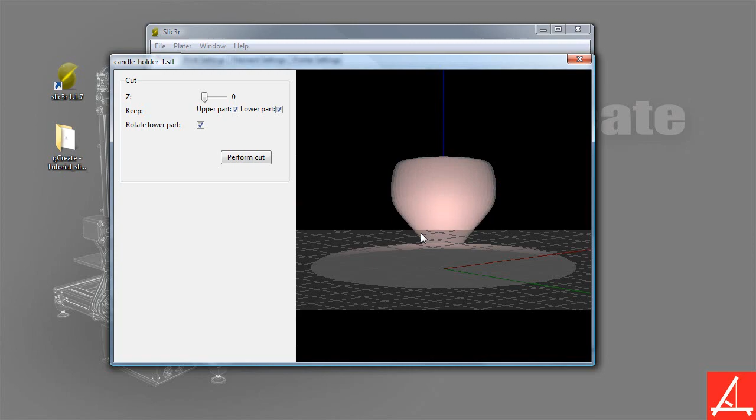One good way to check is, in Slic3r 1.1.7 at least, to double-click the model, and you'll have a 3D representation of the model pop up. This is where you can see if there's any open faces or any problems. This particular model has no problems - you'll see that it's a very clean, simple model, and it's a candlestick holder.

So I just wanted to show you that if you see errors under manifold, it's a good indication that something's wrong with your model. Again, if you double-click the model, this is a good way to visualize your model, and I can briefly describe how the slicer is going to operate.

So what we're going to do is slice this model into a series of layers. This particular model doesn't require support, and it doesn't require a whole lot of infill. By support, what I mean is - this is obviously the side view of the model here - and you'll notice that this overhang here isn't too extreme, so our printer can actually print this type of overhang just fine.

If this was a much steeper overhang, something like this, then you might have to have support below to actually hold up each layer as it's printing.

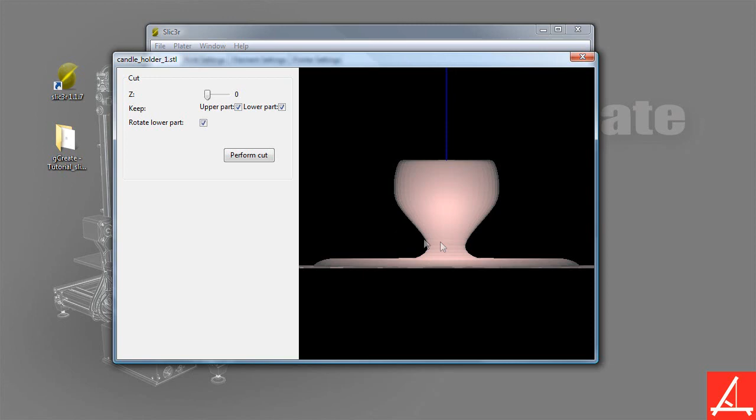In this first model, we're not going to have any support required. We just want to show you a very simple model to slice with.

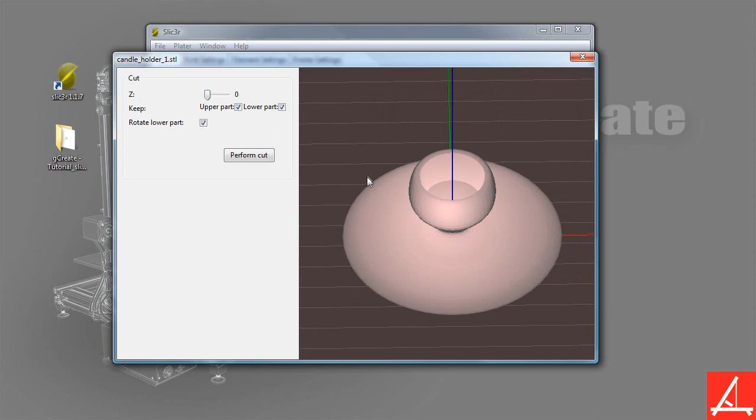These settings here are built into Slic3r. If you wanted to cut the model and have a flat surface on the bottom, or split the model in half, you can do that, but we're not touching these.

These are ones you can play with on your own if you choose. Okay, so basically what we want to do is we have our model loaded.

If you wanted to go ahead and view the info of the model, it's here. The different settings for the different material types and print settings you might want to use are here. These are the default settings that we supply with our printer.

And you can choose your default material. As you build up your material and filament collection and your print setting collection, you can add your own presets if you want.

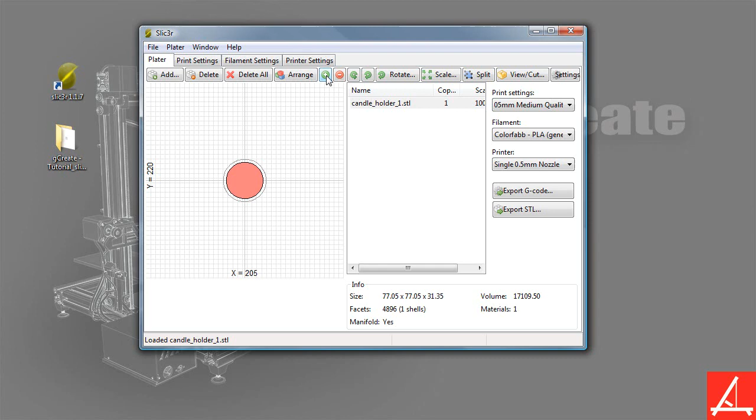There's a few different buttons here that we're not really going to play with right now, but the basics are that if you want to print more than one of these models, there's a button where you can duplicate and print many at one time. Every time you click plus, it just adds one of those models, which you can individually move around on your platter if you wanted to.

And as you subtract, it just takes away the last one that you added. This is a good way that if you want to print 10 of the same object, you can do so. Also, if you want to subtract the model or rotate it, you can do that.

Scaling is very important. We've noticed that with some of our models, the conversion from inches to millimeters or vice versa, scaling is very important. So if you pull your model in and it's very small, chances are you have to scale it between millimeters and inches.

If it's very small and you want to go to the proper size, we found that the proper scale is actually 2540. That's the proper scale to go from millimeters to inches, or vice versa.

But in this particular case, this model's already been scaled and everything's proper on it, or actually it was exported with the proper scale. You can also split and cut view your model. View cutting your models is done by double clicking, as you see here, or you can also click that.

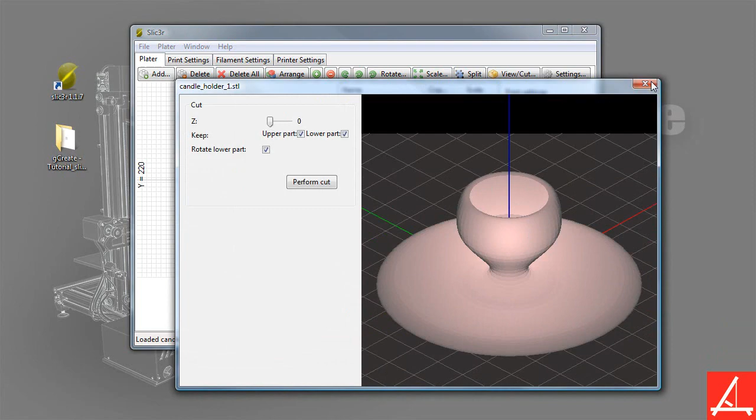There's also different settings you can change per your model. There's a lot of modifiers you can add and a lot more advanced features. We hope to cover that in a future video, but for now it's definitely not important.

So basically, after showing you the general overview of the main window, now that you have your model loaded, if you go to Print Settings and make sure you have medium quality selected, you can pretty much go ahead and slice your model.

What we're going to do, I want to show you, we're going to slice it in 2 different layer heights so you can see the dramatic differences. So when you click these different settings, you can actually change them and then save it as a new preset if you'd like.

Or you can just go ahead and do a one-off and export it as is. But basically, these settings here are supposed to be jumping points. They're not supposed to be end-all, solve-all settings.

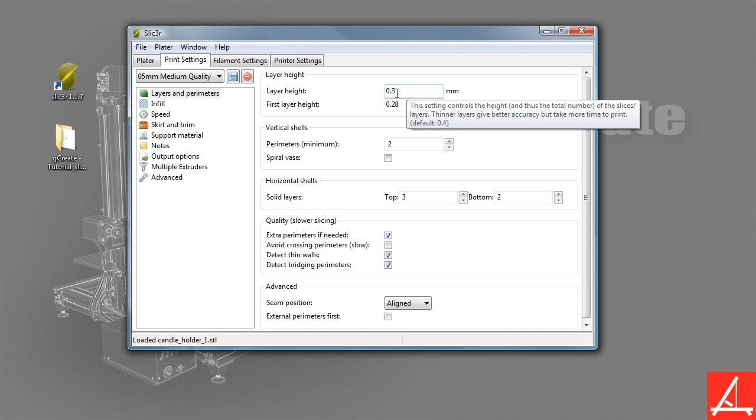But again, as I mentioned, I want to do 2 different slices. So one will be where layer height's at 0.3, and we're going to set infill, keep it at maybe like 20%. Speed, everything else should be fine.

And then go back to your Plater, and now we can go ahead and export G-code. Let's just go ahead and save it. I like to save it so that I remember what the layer height was. You can actually open the file itself, but it's easy just to see the file name. So let's say it's, what did I say, 300 micron is the actual layer height.

And the slicing of this should be relatively quick. It's not a very complicated model.

As you see, this is real time. It was done in a matter of seconds. Now also what we're going to do is go ahead and turn the layer height down to 0.1. So we went from a 300 micron layer height to a 100 micron. So it's actually 3 times as many layers, or I guess 1/3 the layer height. So theoretically, this should take 3 times as long to print, but yet our print should be much smoother.

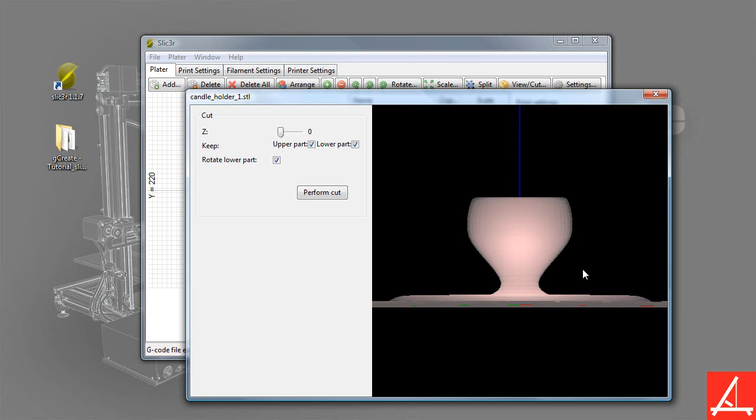Lowering the layer height and making it a finer resolution, it really only comes into play, in my opinion, when you get very low slope surfaces. So you have to remember that when you're slicing this model, it's slicing the side view into many layers. So when it's slicing these into a lot of layers, this area up here, because the walls are almost vertical, you don't notice the layers as much. Now down here, because it's so flat, think of it as like a topographic map. You'll see the actual layers on this lower portion here.

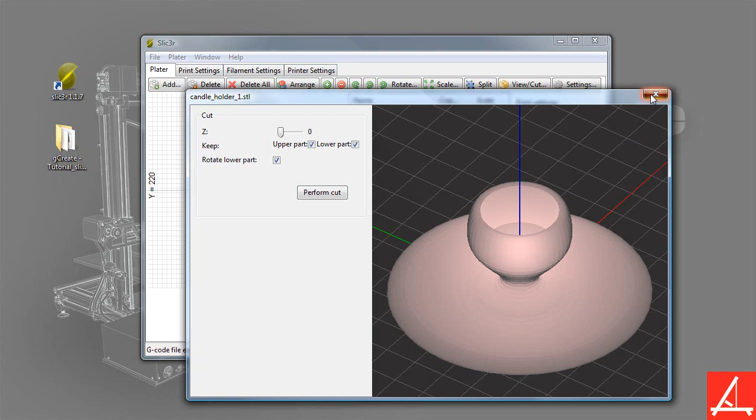There's advanced techniques where you can actually set it so that this lower part here will have a finer layer height than the upper part. But for now, I just want to show you where we do 2 completely different slices, one at 300 micron and one at 100 microns. So now that we've already set this layer height to 100, there's no other changes. Everything else is identical. Let's just go ahead and go to Plater and do Export G-code now.

You'll see that the first one's already been saved, called Candle Holder 300 micron. Let's go ahead and save it as 100 micron for the new file name. And again, it should slice pretty quick, but it's going to be slower than the last one because now we have 3 times as many layers. Okay, now if we open up this folder, we should see one file and another file.

You'll notice that the 100 micron is 2.1 megs, and the 300 micron is 849K. So it's actually a pretty big difference, because this 100 micron file has so many more layers. So keep that in mind. Quality is not always what you want. Sometimes you want to do a quicker model because you don't have 3 days to sit there while it's printing, but it's very important per model, because if your model has a lot of low flat surfaces, well, maybe you do want to do a higher layer count.

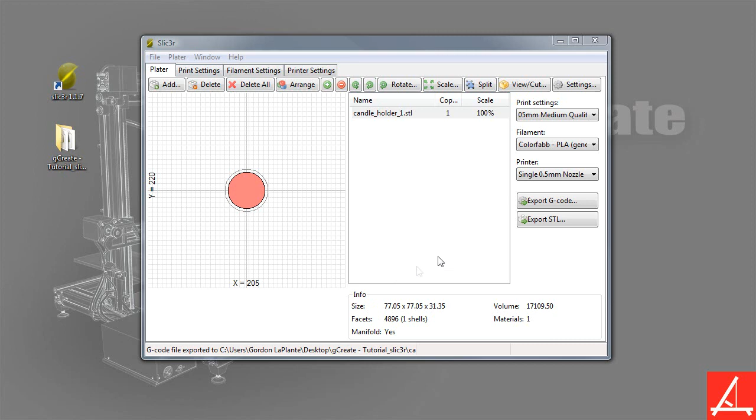Okay, so now that we have those two saved, I'm going to go ahead and go over and print them, and I'll show you the results. Hi guys. So I loaded the 100 micron file into the printer, and it's printing away right now. If you listen softly, you might be able to hear it. It's actually behind me, but while that's printing, I want to give you a quick overview of, now that you've sliced your model, how can you actually see what it looks like slice-wise? Like, how can I actually watch those paths?

We're printing our model from the LCD screen on the printer, so we're actually not controlling it with the computer. But if you want to see what every slice looks like, which I highly recommend, you can use Printrun or Pronterface to do so. So I actually have it open here. We're not going to go into what this program is in this tutorial, but this is the program we recommend as the host software if you want to run your printer from your computer.

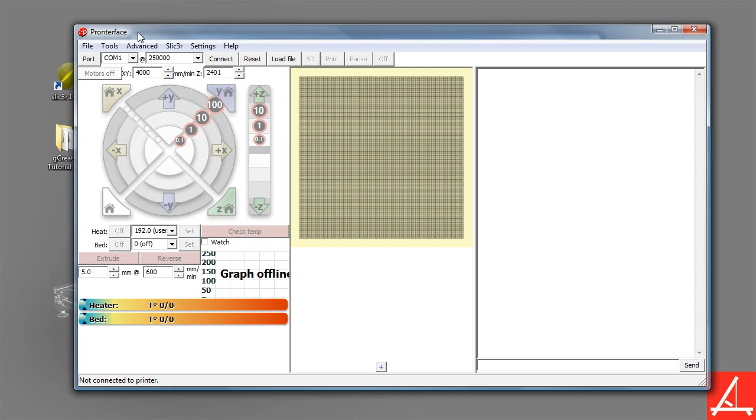But the reason I bring it up is because it also has a visualization engine to visualize the G-code file that you just created. And there's plenty of them out there. Repetier has one and everyone else, but this one's the quickest, in my opinion. It just works really quick and it's easy. So go ahead and open it, and now you can go to File, Open, and open the G-code file that you just created, either one, let's say at 100 micron.

And now if you give it a second, it's going to tell you some important information. So first off, how much filament is used in the print. So we're using about 4600 millimeters. In my honest opinion, that's a pretty small model.

Each 0.75 kilogram spool from Colorfabb has about 250,000 millimeters of filament. That's a pretty good guess right there. So that would mean that each 1 kilogram spool from eBay or whatever would have maybe about 310 or 320,000 millimeters. So we're only using 4600. So it's a pretty small print.

You also can see the overall width, the depth, and the height, as well as the estimated duration. So this is saying it's going to take about 55 minutes to print this model. Don't forget, this is at 100 microns, so it's a very fine layer height to print this for about an hour. I found that with the estimated duration, pretty much across the board, add 10% to that time, and that's your actual time.

If you're doing a 20-hour print, add at least 2 hours or an hour and a half, because sometimes the newer version works much better, but it's still a little bit off. So this might take, instead of 55 minutes, more like 60 minutes, something like that. But yeah, this is a very useful tool because you can see how much filament you're using and the estimated time.

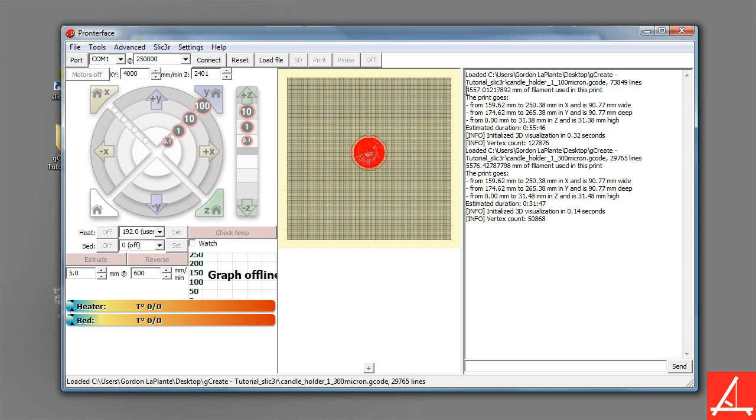Using these G-code visualization tools is a great way to test all the different slices you might do, because you can slice this 20 different ways and then see what each one does. Something else that PrintRun has is if you double-click the center space, you'll get a quick visualization of the model. So if I zoom in here, right now I'm on the top layer. As I scroll down, in cyan there, you can see what every single layer will look like.

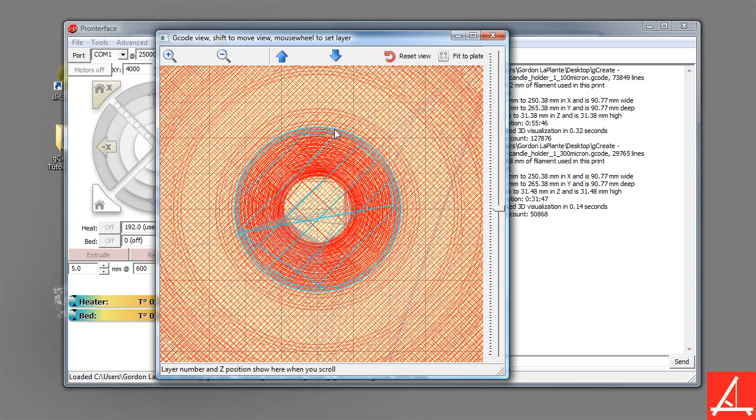So this is a very useful tool because you can see, let's say about midway through the model, here you can see the outside. This is the shells I was talking about. And then here, these diagonals, this is the infill. And as I go down one layer, the infill goes the opposite way. So the way this particular infill works is each layer alternates, but it still makes a grid.

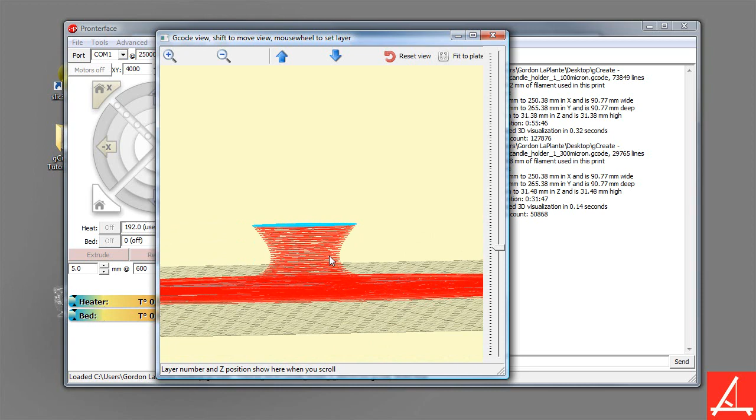And you'll see the outside shell is stepping in because of the portion of the model that we're at. As you turn it, here you can see all the layers on a side view basically. As we step up, that's each one of those layers. And here's the infill, because this happens to be a solid portion of the model. This is a really good way to think of 3D printing. Don't forget that there's a series of layers, so as you're going up or down your model, you can see all of those layers.

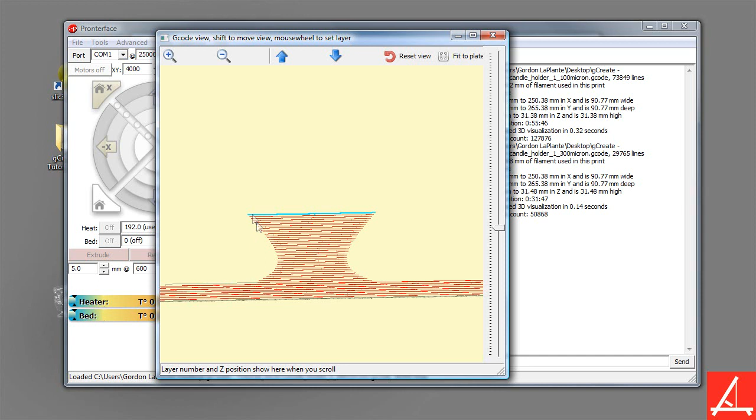This is very important because at this point in the model, if our model went way out here, there's nothing below to support it. It's not printing on top of anything. Because this angle is not too steep, it's actually printing on top of itself from below. It's just enough that it's close. But if it was really extended, that's where you would have to have the support material we were talking about. Otherwise, as it prints that layer, it'll just drop on top of nothing and create a mess.

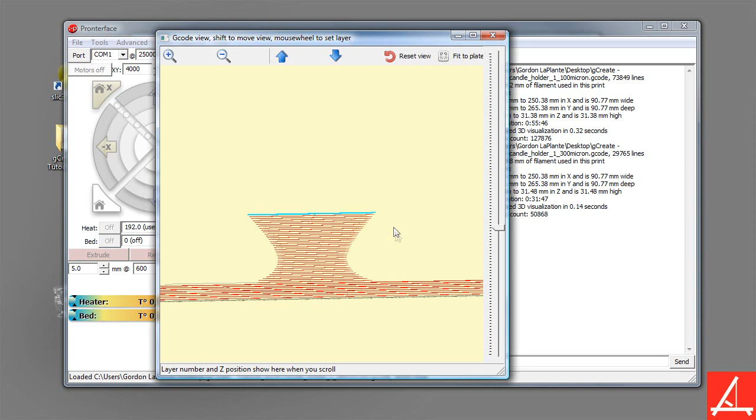So keep that in mind while you're slicing. But in this particular model, even at 300 micron, we shouldn't really need it. So actually, I want to go ahead and open the 100 micron one again, because you can see that there's a lot more layers.

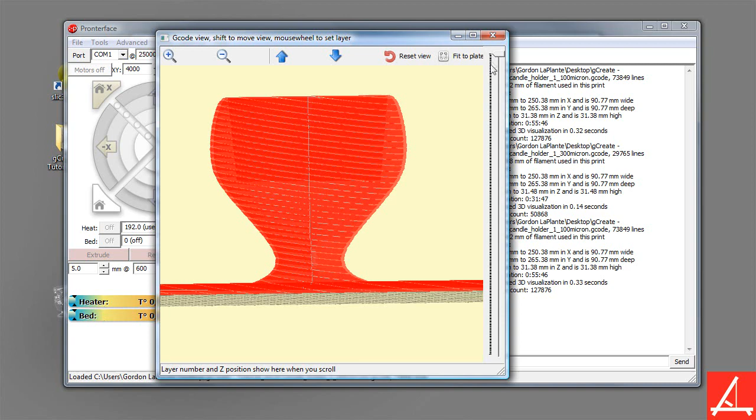Okay. Now you can see, look at how thick all that is. Now as I scroll, and this bar here, actually, these are all the layers. There's a lot more layers. Now the important thing is, as the layers get finer, as I zoom in, you can see that overhang doesn't matter as much, because now each layer going up the next step, it's just a smaller overhang. Whereas before, each overhang was very big, very big, very big.

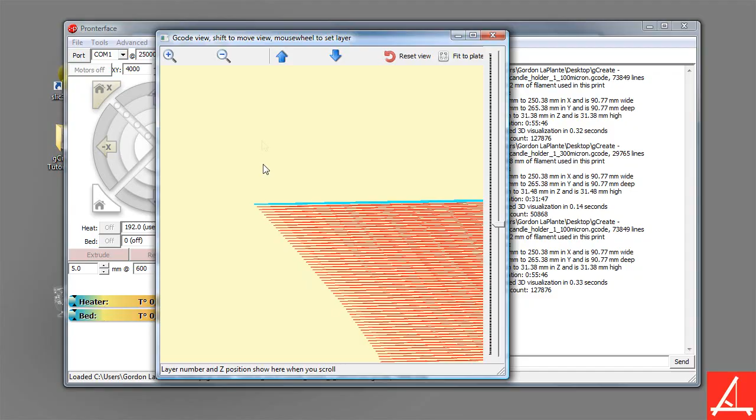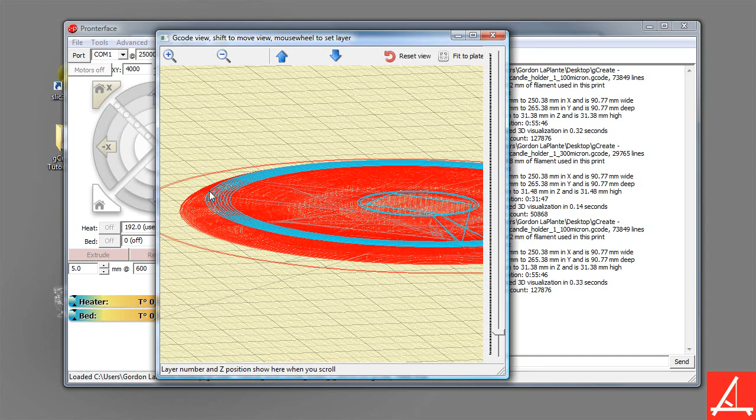And you can also see, let me scroll over here, as I go down the layers and we get towards the bottom, as I mentioned, now here's where you start to see that kind of topographic map I was talking about. Because it's such a shallow angle, as it's printing in the center part of the model, it's actually printing these outer layers as well. And then look, it's actually doing 4 outer layers here, and that's the last one. And then it's doing, what is it, like 8 almost? Yeah, 8 layers here, and then a whole bunch more. So very shallow portions of your model is where you'll actually see the layers the most.

Now, in the case of that 300 micron file, this is going to be much, much more of a rough portion of the model. You'll actually see the layers go around and around. But again, if you're going to finish it with a paint or some sort of finisher, Bondo or something, it doesn't really matter. But if you're going to just print your model and pull it off, well, maybe you want it finer. But it really is all a matter of time and quality that you have.

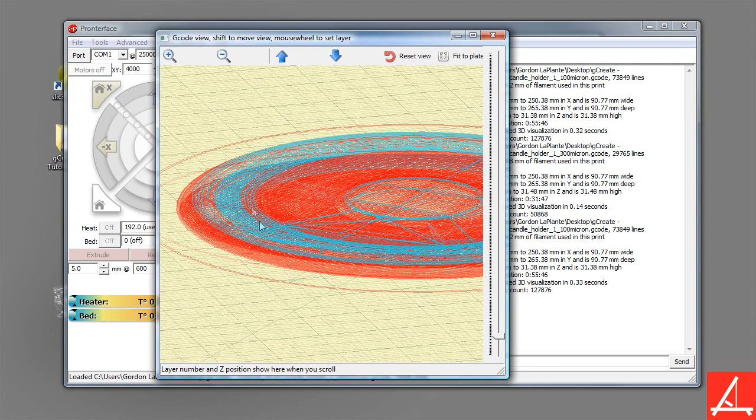But yeah, I just want to give you guys a quick overview while we wait for the print to finish of how to actually look at your model and see how much filament you're using, as well as how long it might take. So I'll get back to you in a second.

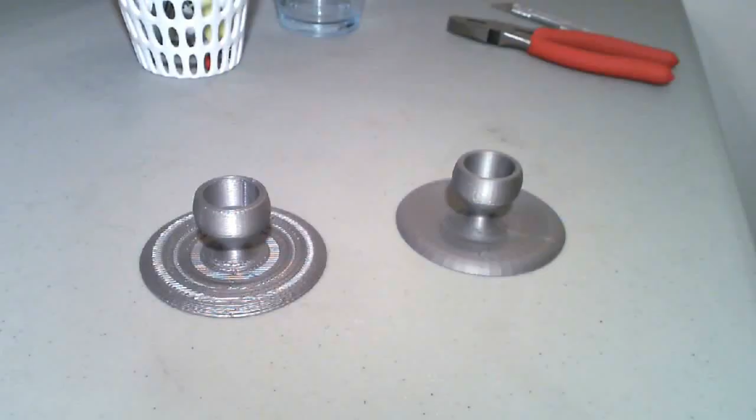Okay, so the print's just finished, and I just popped off the 300 micron print, which you can see on the left side of the screen here, and the right side of the screen would be the 100 micron print. And you can actually see a pretty stark difference between these two prints. The filament I chose to use is actually a ColorFabb. I believe it was shining or sterling silver. It's actually a PLA, but it has a very high reflectivity, kind of specular quality to it. So it's a little difficult to print with, depending on if you have your slicer settings set up just right. But I purposely chose it for this tutorial so you can actually see the stark differences between the two.

Also, I know earlier in the tutorial we estimated how long we thought it would take to print each model. So it turns out the 300 micron print on the left side took about 38 minutes, while the 100 micron print, which has essentially 3 times as many layers, took about 1 hour and 9 minutes. So it was a little over twice as long. Sometimes it takes 3 times as long, sometimes it's not quite that dramatic. But in this example, maybe it's worth that extra, twice as long time to get the results you see. So let's go ahead and jump right in.

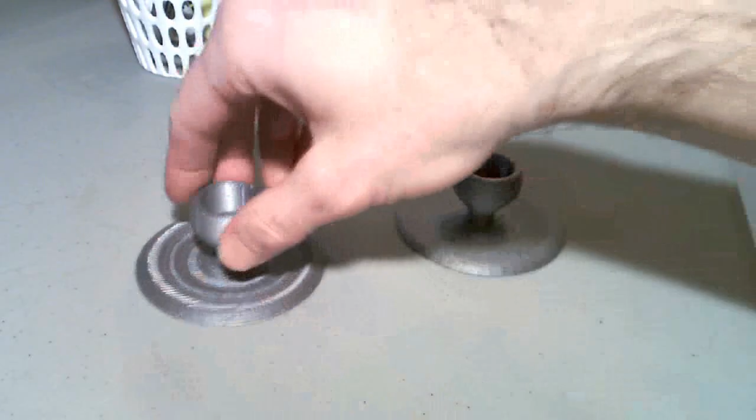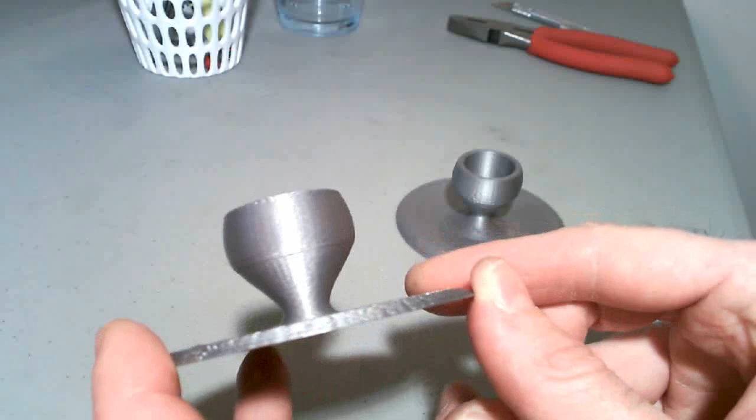For the 300 micron print, as I mentioned earlier in the tutorial, the upper portion really didn't have a problem. It printed pretty nice and pretty clean. Because you're going up along the layers, you really don't notice the layers as much compared to the lower portion. So the lower portion, because it's such a low slope right here, you really notice the layers, and you really see the steps between layers as well as the infill from the printer itself.

So comparing that to the 100 micron print, it's a dramatic difference. So in this particular example, even though the top might not be all that much more detailed, you really notice it in the lower portion. So it really depends on what your model qualities are and what model you're bringing in, and that's what's going to determine your slicer settings. If you happen to have a portion of your model that looks like this, maybe you want to do a finer layer height, somewhere around 100 microns or less.

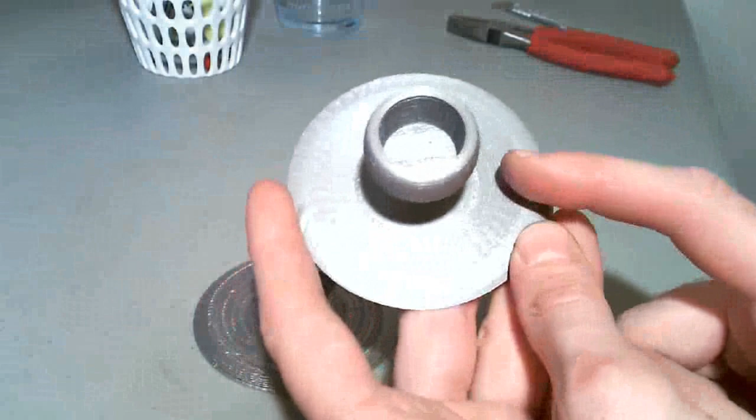But if your whole model consists of a tall vertical piece, well, maybe you don't need to go that fine of a layer height, and you can save yourself some time.

Also, what I want to bring up, as you see pretty much right here, this is the aligned seam I was talking about. So we had the seam set to aligned. So you actually see this is the point where the printer runs around and then lifts up, and then runs around and lifts up. So it lifts up in the same spot each time, basically creating a seam.

Depending on what your print is, you might be able to just turn it and hide the seam so you don't care. But if we turned the seam to random, this individual seam would be spotted all around the model, so you might not really notice it as much. In this example, you can also see on the inside here. In this example, it didn't really bother me just to have a seam there. So yeah, that's why we kept it on aligned.

Also, I want to bring back that if you did choose to print at the 300 micron level, and you have this pretty ugly lower portion, if you're going to finish the model later with another material, well, maybe it doesn't matter. So maybe you save yourself some time by just raising the layer height and making it much more crude to get quicker results. So okay, here you go. You can see some actual first physical results from your very first slice.

So as you just saw, we just finished the first print of our first model, the candlestick holders, which was a relatively simple model on purpose so that you can get your feet wet with actually printing. What we're going to do in the second half of the tutorial is slice something that has a few more variables, so you can see what 3D printing is really about. Instead of just printing very simple models, sometimes you're going to have more complex shapes, or you're going to need overhangs or bridges or support material.

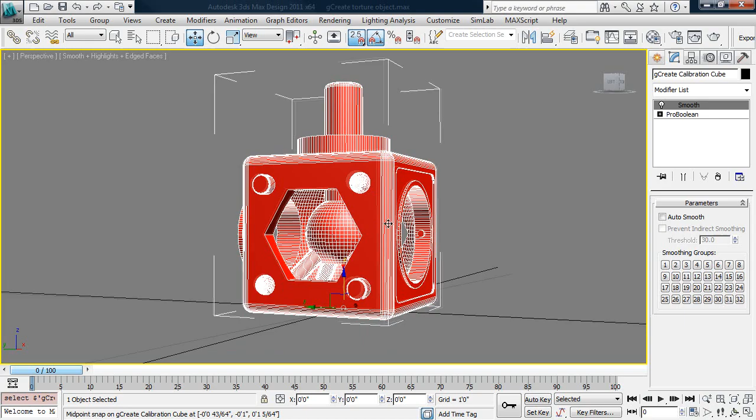So we went ahead and created what we're calling the gCreate calibration cube. It's a cube that can nest together with other cubes, and it has a lot of different things in it that relate to all the different settings for 3D printing. So I'm going to open up 3D Studio Max, where we designed the calibration cube. And you can see here, this is the cube itself. As I pan around, it's a 2-inch cube that has chamfered edges.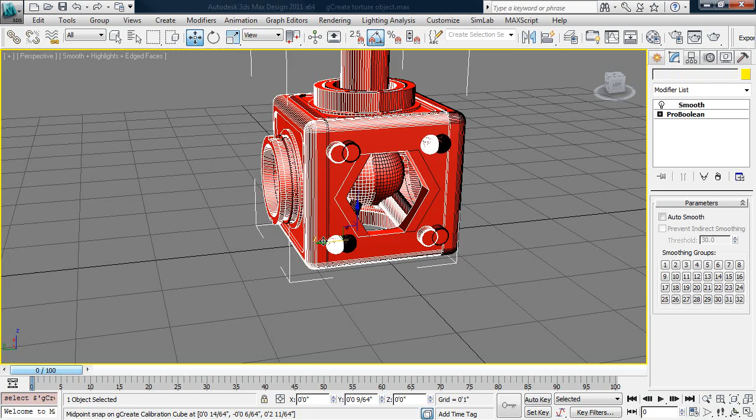And there's an opening on one side that has these two little nubs. This corresponds with the opening on the other side. And there's actually openings here. So if I were to take a second cube and put it over here, you can just literally snap it in place. You have to rotate it and then snap it in place to get it to stay. Or you can also add cubes above.

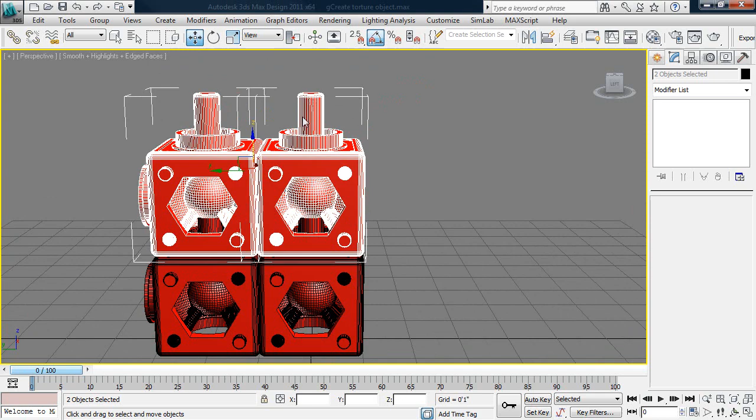And then this upper portion here actually seats into the model. You can see in wireframe here, it actually goes inside the model on the bottom. So if you look at the bottom of the model, there's actually a hole there. So I'm going to delete these other ones.

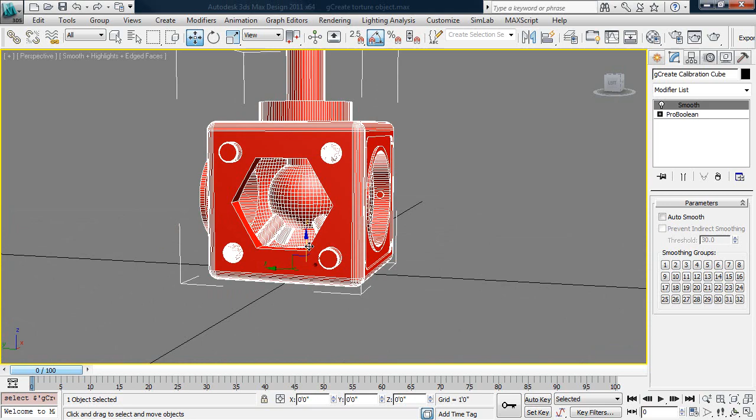You'll see that, as I said before, going around the model, these two pieces on the side here are cylinders, and these are two domes or spheres that correspond to these holes on the other side. So this whole model really should connect together.

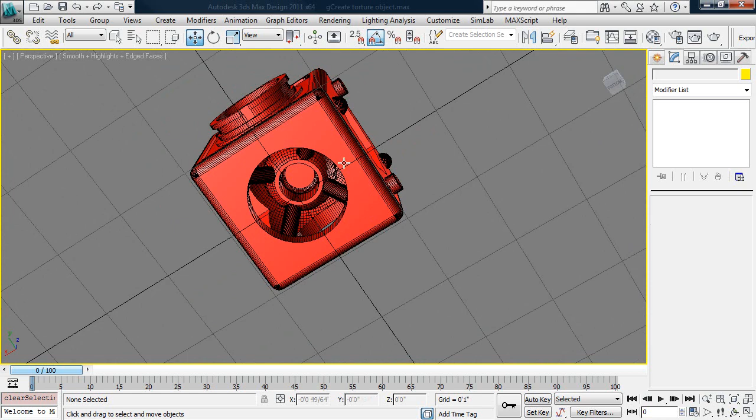And there's a lot of different things in this model that's great for 3D printing, whereas below this piece here is essentially printing on top of nothing, so we have to support it with support material. Same with these guys here. This is actually what's called a bridge. You're bridging straight lines from one side to the other, but we're going to turn support material on for those as well, just to show you.

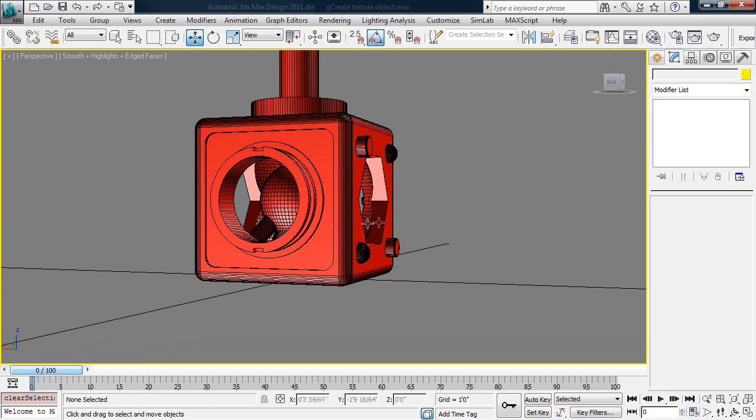These projections here, as you print layer by layer by layer, it gets to this point and there's nothing to print on. You can kind of see the side view here. So these pieces here will just droop into nothingness, so we actually have to support those as well.

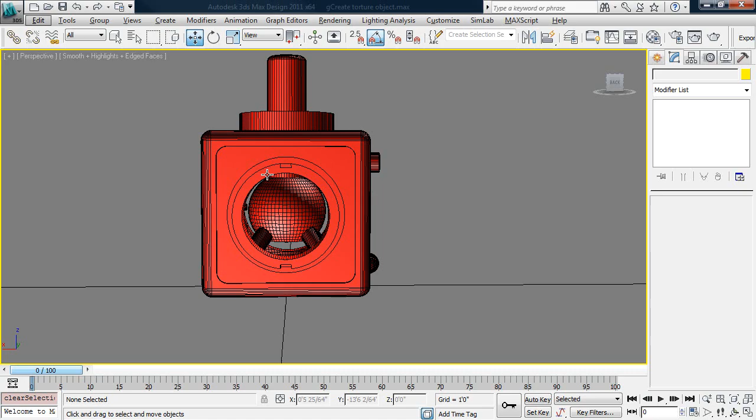Inside here, these circles, these kind of cutouts, actually the top here could probably be printed without support, but it sometimes gets challenging because as it's printing layer by layer and working its way up, these edges really start to kind of bend sometimes and tend to have some issues because there's really nothing it's printing on.

So anyway, we hope if you go to our website, just like before, and download the files, you'll see this calibration cube, and you can go ahead and print it along with us. So let's go ahead and close this, and now we're going to open Slic3r, just like before. I have it set right now. I'm just going to keep it as a default to start with, which is medium quality.

We're going to use Colorfabb PLA, the black PLA, and we're going to do it with a 0.5 millimeter nozzle. You could do this with a 0.35. You just have to select obviously the different nozzle size. So just like before, with Slic3r open, go ahead and open up your folder, and under gCreate Calibration Cube, you should see the STL file. So let's go ahead and pull that in here.

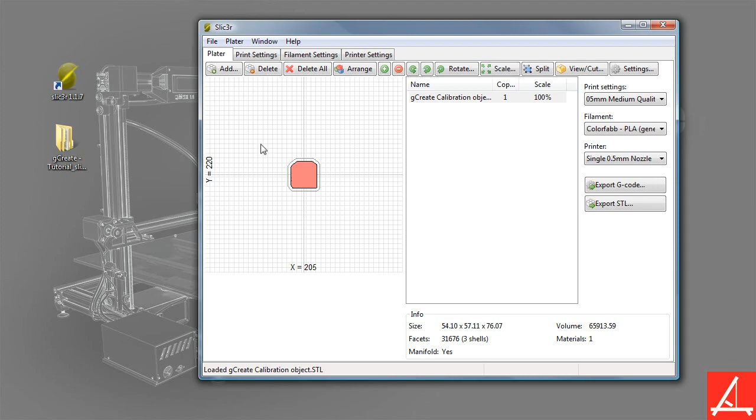And also, just like before, you'll see that manifold is set to yes. That means it's basically a watertight, nice, clean model, which we made in 3D Studio Max. Here's your size. So it's 54 millimeters by 57. 50 millimeters, somewhere around there, is actually 2 inches. So it's 2 inches by 2 inches, and then it's actually a little taller because that center part pops up, as you can see here. So this was that preview that you could double click on and get the preview.

So the settings we're going to use for this calibration cube are pretty simple. We're going to do one print at 100% scale and keep everything just one simple cube. If you go to print settings and you already have it set to medium quality, you should see the default layer height is 0.23 millimeters, or that's 230 microns. So we're actually going to set it to 200 microns, or just 0.2. That's a great layer height.

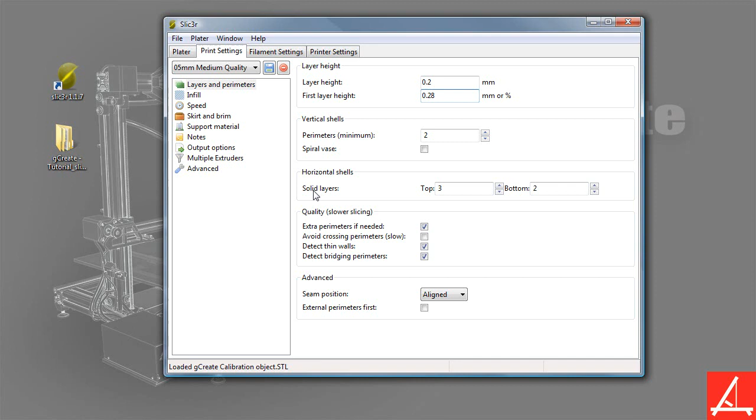You'll still get a nice smooth finish on the outside, but if you go lower than that, you don't necessarily need it because the edges of the actual cube are vertical, so you won't necessarily notice the difference. Otherwise, you'll just waste some time. If you look at vertical shells, we're going to keep it at 2 for now. I'm looking at the settings here. We're going to keep it at 2. Horizontal shells for both the top and bottom solid layers, there's no need to change that.

Really, the only thing we're going to change would be the actual infill. By default, we set it to around 40%, which is a fairly solid infill. Obviously, 50% would be half full. We don't really need this to be a solid infill, so if we lower that number, it'll just speed up our print. So we're going to go down to actually 15% and keep it as a pretty light infill, which will speed up the print a little bit, but also we don't need that extra support.

Everything else you can leave the same, just as I mentioned in the earlier portion of the tutorial. Mouse over all of these different settings and you'll get really detailed tooltips that tell you exactly what it does. Okay, going along. Let me take a look. Speed. We're not really going to change anything. The only one we might change would be external perimeters. To speed up the print, you can speed this number up and maybe put it to 60, 70, or 85 millimeters a second.

If you have a lot of detailed, small, little outside movements, a lot of jagged movements, or you're doing a very detailed model, keep this number low because that'll make sure that the outside of the print is nice and clean. But if you're doing basically a sphere, which is a very simple kind of object, or from the earlier portion of the tutorial, if you did the candlestick holder, there's no reason not to speed this up because it's just a simple curve. There's no jagged edges. In this case, we'll just leave it at 45. That's kind of our default value.

Now, really, the only thing we're going to change next will be support material. By default, we have support material off because for a lot of our models, any of the models for the actual printer, we don't use support material. But depending on what you're printing, you might have to turn it on.

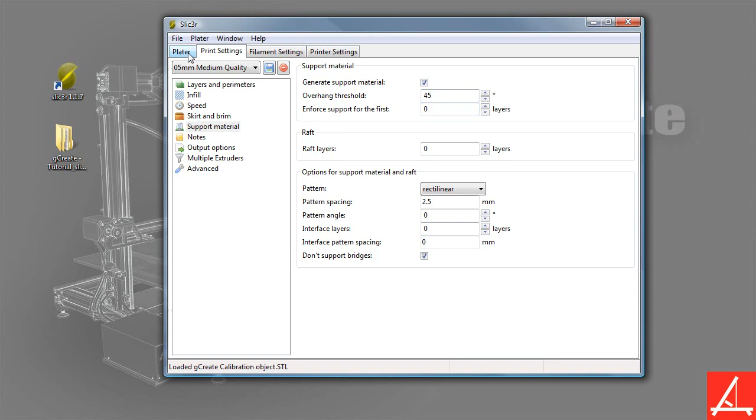So when you turn on generate support material, what it's going to do is any of the portions of the model that overhang on top of nothing, which I'll show you here, it'll actually add support material. So basically, this portion of the model, which is essentially hanging on top of nothing, when it gets to that point of the model, it's going to try and print on top of nothing. It'll generate support material right here.

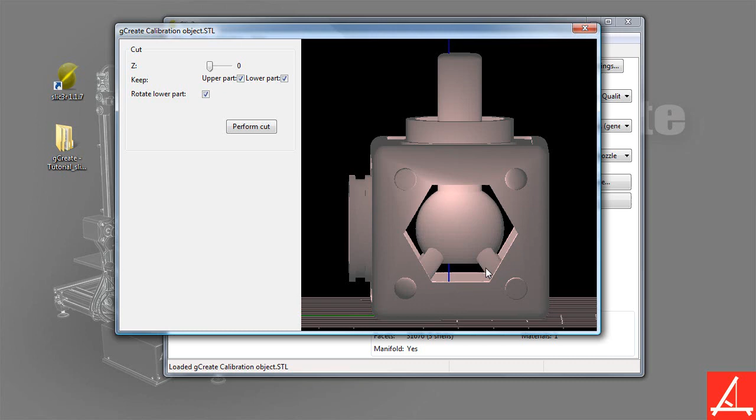Also, the inside of the model, as you can see from the side view, this here is printing on top of nothing. So it'll actually generate support material below that, which then, when it gets to this layer of the model, it'll actually have something to print on top of. So you'll see various portions of the model which will have support material. These projections here on the side will have support material because there's no support below right now.

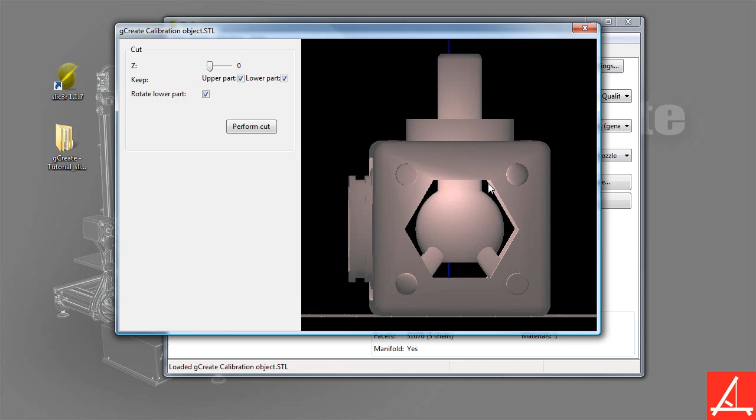And the way we're turning it on, this here is actually called a bridge because you're bridging. Let me get the side view. You're actually bridging from one side to the other. It's a straight shot. So you can turn on a feature where you don't need support material below, but we're going to leave it on just so you can see what it looks like to have support material there. Our printer can actually print from one side to the other without necessarily needing support material, but you might get a little bit of a sag as the filament goes across.

So it depends on if that matters to you or not for that particular model. Go ahead and close this. So back to print settings and then support material. We're going to turn it on and we're going to set it to 20 degrees. So what this tells us is anything that's 20 degrees or less will then generate support material for that portion of the model.

So any portion of the model that has an angle or a face that's really 20 degrees or less, it'll generate support. In this particular example, as you can see with the tooltip, 90 degrees is considered a vertical side. So as you start turning that to become horizontal, then you're going down to 0 degrees. This number here, 20, is probably the lowest you might want to go. You can go down to 10 or 15 depending on your model. But basically, if you do need support material, you have to look at your model to see and determine yourself where you need to have it.

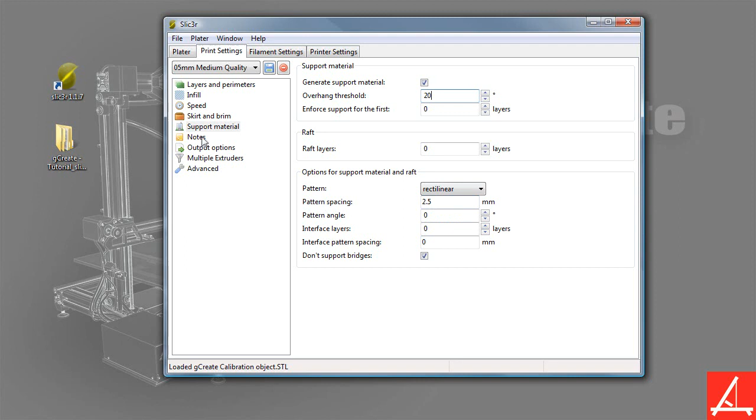Everything else, we really don't have to change. We're going to keep output, extruder, advanced. Everything else we're going to keep the same. Make sure you have your filament set to whatever you're using. We recommend, especially if you're starting out with 3D printing, just stick with PLA. We also recommend colorFabb because it happens to just print really well. But PLA is a little bit easier to deal with than ABS, so just stick with PLA at the beginning while you get your feet wet.

And then printer settings, that's it. So now that we've loaded our model, we have everything ready to go, we've changed our settings, we can click Export G-Code, and this will actually export our file.

So if you want, you can actually put some of your settings in your file name so you remember what it was. So I want to say this is 200 micron, and I'll remember that was 200 micron layer height. If you ever change your scale, sometimes what I'll do is say like 50%, and that means it's 50% scale, but it's up to you. I just find that having it in the file name is actually a little bit easier sometimes than having to dig through the actual file to figure out some of your settings.

So go ahead and click Save. And now you'll see the actual slicer engine generate perimeters and go through all the calculations to make your G-code.

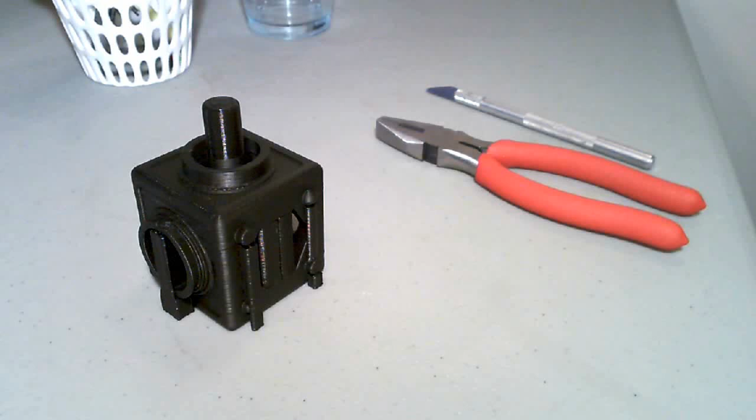Okay, so the gCreate calibration object just finished printing, and I just popped it off the printer. I left the support material on so you can see what it looks like fresh off the printer before removing it and cleaning up any problems. It was printed in colorFabb Black PLA, which prints like a great material, and as you can see, the layers look fantastic.

This was set at 200 micron layer height, which happens to work really well for this type of model because we don't have a lot of shallow sloping curves, but rather more vertical angles on the sides.

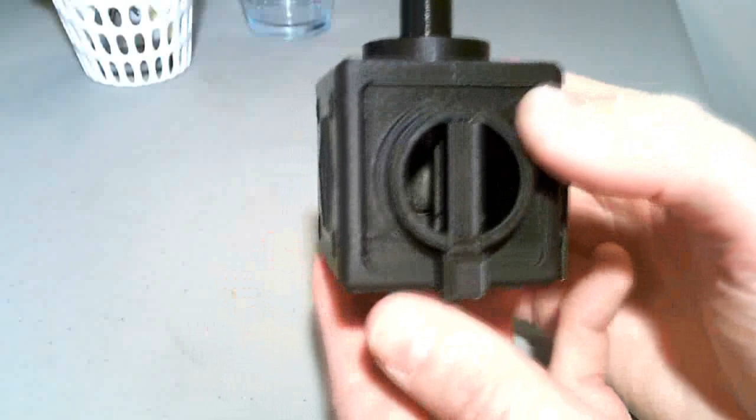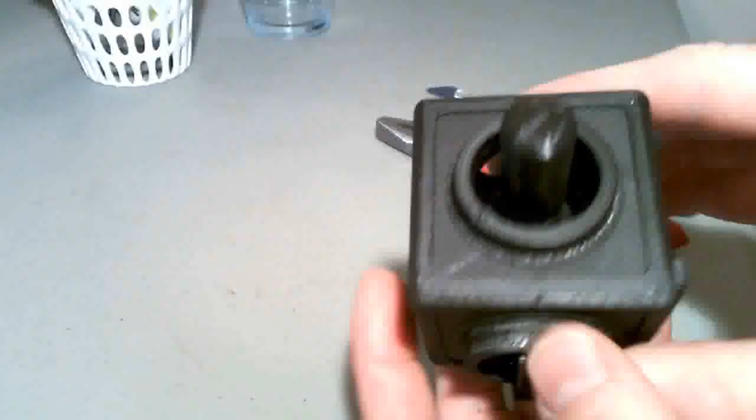So if you look closely at the model, I'm going to rotate it so you can see what it looks like fresh off the bed. Here's the support to hold up the bridge above, and this is supporting the top of the circular cutout. You have support material on the sides here, supporting these four projecting pieces. On the top here, it's interesting to note that it's a little shinier than just inside down here. That's because the top printed a little faster, since the bottom was printing all these other pieces.

So it really depends on the speed you're printing at, which will sometimes change the sheen of the actual material. Just something to keep in mind.

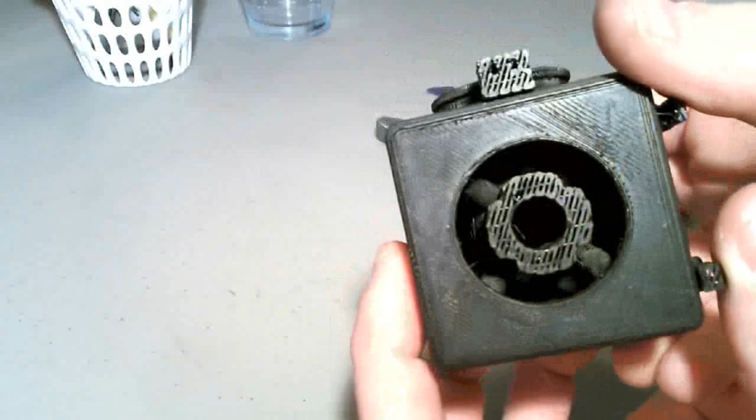If you look at the bottom here, you can see the support material holding up the center sphere there. And then here's the top of the sphere in there.

This was printed with the 0.5 nozzle as we typically use, and you can see the results from that. The corners themselves have a slight radius, but it prints much easier and better with the 0.5, which we found over the years.

Okay, so I'm going to slowly pull apart the support material, and we can see what the model looks like when we're done.

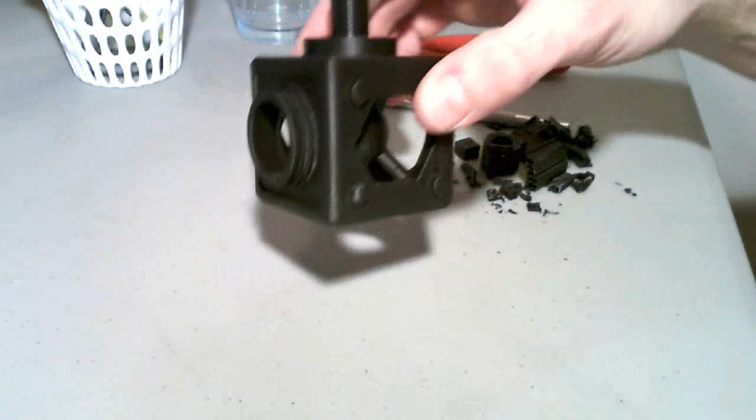So I finished removing all the support material from the model, and I cleaned up a few of the edges that had a little bit of support material stuck there. I used an X-Acto, and as you can see, the print came out pretty nice.

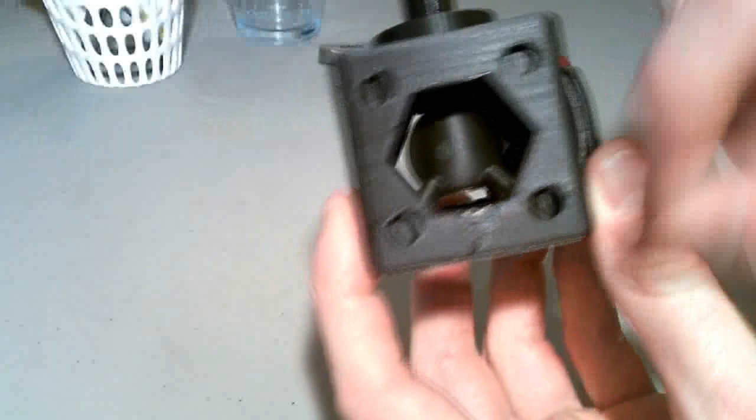Unfortunately, here, this is my own fault. I got a little too aggressive with the pliers and dug into the edge of the model. So it really pays to take your time removing support material if you care about your model.

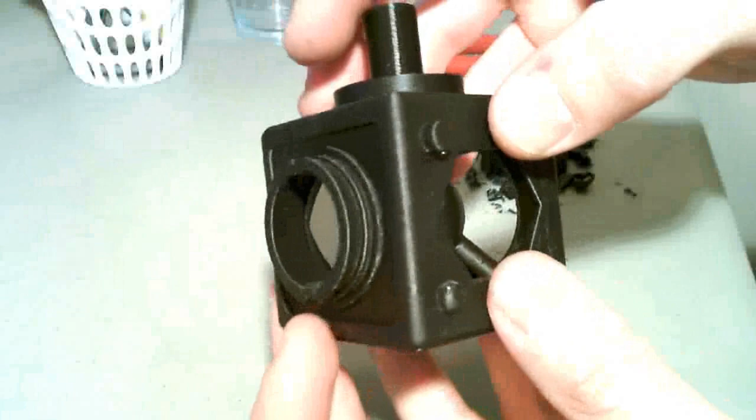But in the end, here you can see what a calibration cube should look like. We had a little support here, obviously, to hold up these little pieces. These actually could be printed without support, but we turned it on just to show you what it would be like to remove it on the sides.

And then underneath here as well, this had some support material. As we go around, you can see every side. Underneath, there's a hole so that this top part here can seat into it if you wanted to place another cube on top.

And then these two pieces here, and these two pieces, as we mentioned, line up to the other side so you can snap together a cube. And lastly, this piece here will lock to another cube that you rotate to lock into place, with these little pins on either side inside of this part here.

So there it is. That's the second print we did with the calibration object, and you can print as many of these as you want and lock them all together to make a bunch of different designs.

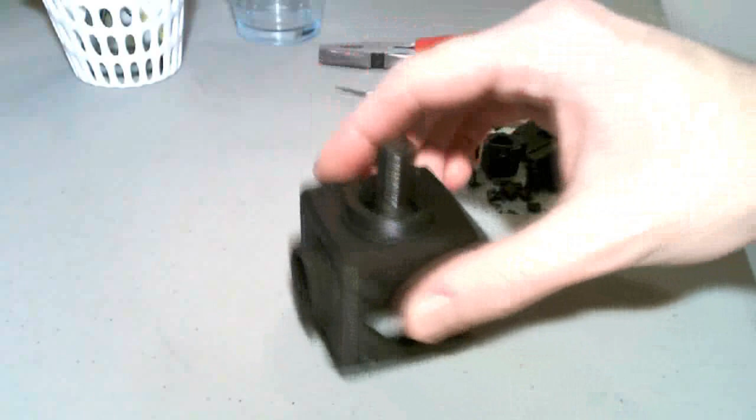We hope you enjoyed this tutorial and learned something about how to slice different types of models. Every single model has different settings, or should have different settings, depending on what the model looks like. You're going to have bridges and overhangs, and you might need support material, you might not. You might need a finer layer height, you might not. It really depends on what your model looks like, and the more you slice and print, you'll learn this along the way. So we hope you enjoyed it and look forward to part 3, which will give you a whole bunch of new information.